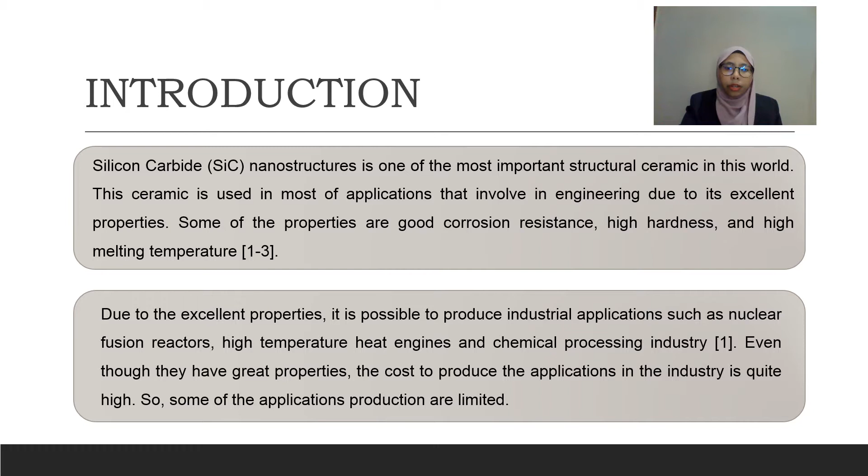Even though they have great properties, the cost to produce the applications in the industry is quite high. So, some of the applications' production is limited. Nowadays, the SiC materials are produced by using the Acheson process. The Acheson process is based on carbothermal reduction of silica by carbon in an electric arc furnace. Nevertheless, this Acheson process is based on an outdated technology which requires high-cost raw materials, excessive energy inputs, long reaction times, as well as products that require further processing before the intended applications.

Other than the Acheson process, these SiC materials also can be produced by a few other methods, such as by reduction of methyl trichlorosilane, by reacting metallic silicon and coal tar pitch mixture, and also by thermal decomposition of potentially inexpensive agricultural waste such as rice husk. Since the Acheson process is costly, the other method that is suitable to be used to produce SiC materials is thermal decomposition of rice husk. This is because the method is low in cost, efficient, and economic. Hence, in this work, SiC was synthesized by pyrolysis of rice husk by using some simple and low-cost equipment.

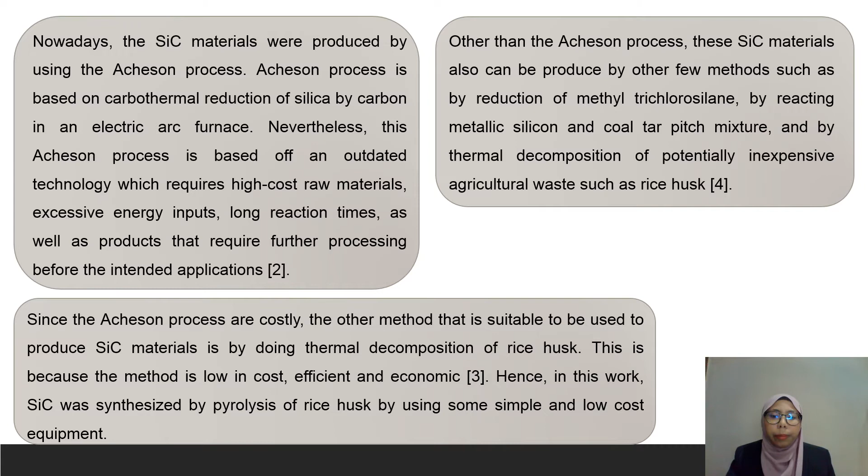For the problem statement, silicon carbide (SiC) is one of the non-oxide ceramic materials that have been recognized by the world for being able to produce strong and tougher composite ceramics and light metal alloys for structural products. With their good properties, the applications produced for the industry are limited due to high cost of production. Therefore, rice husk was used as the starting material to obtain the SiC materials.

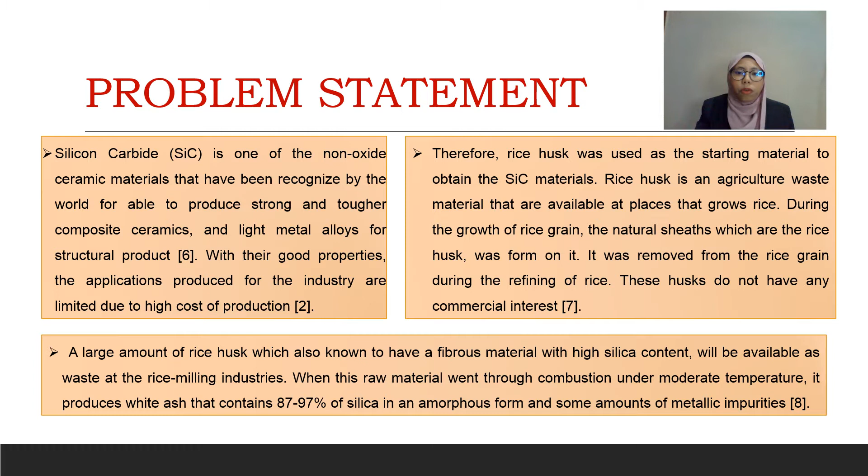Rice husk is an agricultural waste material that is available at places that grow rice. During the growth of rice grain, the natural sheath, which is the rice husk, was formed on it. It was removed from the rice grain during the refining of rice. These husks do not have any commercial interest. A large amount of rice husk, which is also known to be a fibrous material with high silica content, will be available as waste at the rice milling industries. When this raw material goes through combustion under moderate temperature, it produces white ash that contains 87 to 97% of silica in an amorphous form and some amount of metallic impurities.

Next, the objective of this project is to investigate the effect of size of starting material on the production of SiC. The second objective is to evaluate the morphology and the physical properties of the ceramic materials, including SEM or EDX, density, and XRD.

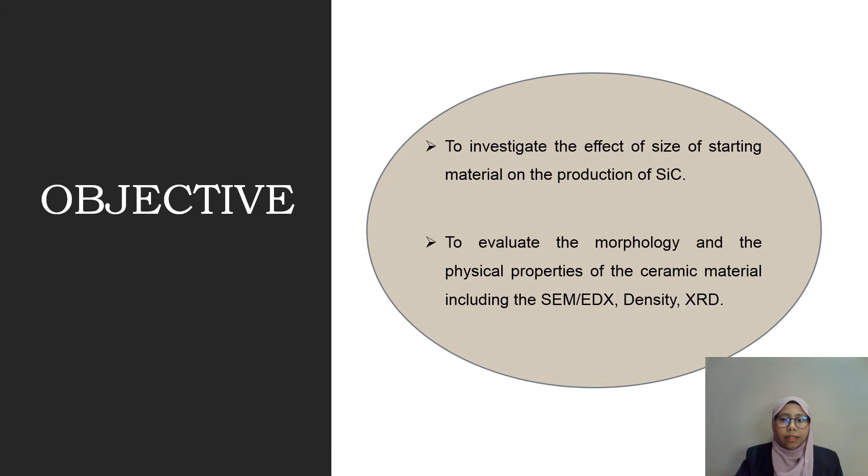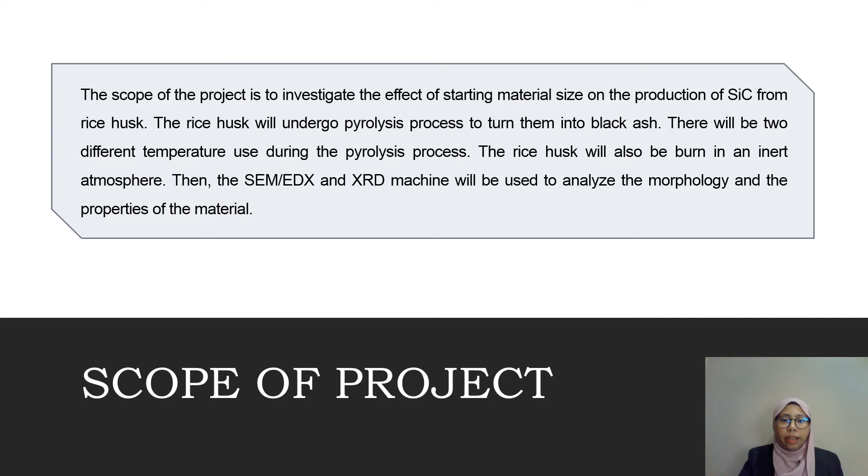Next is the scope of the project. The scope of this project is to investigate the effect of starting material size on the production of SiC from rice husk. The rice husk will undergo pyrolysis process to turn it into black ash. There will be two different temperatures used during the pyrolysis process. The rice husk will also be burned in an inert atmosphere. Then, the SEM or EDX and XRD machines will be used to analyze the morphology and the properties of the material.

Moving on to literature review. The first literature review is pyrolysis of rice husk to obtain SiC ceramic material. There are a few methods that can be used to obtain the silicon carbide material. Despite its excellent properties for industrial application, most of the applications were limited in production because the cost of production is high. This disadvantage has led to intense research on finding alternative sources of silicon carbide that are low cost and renewable. Therefore, rice husk has emerged as one of the promising candidates due to its finely dispersed carbon and silica that are in intimate contact. They also exhibit high activity with one another. Lee and Cutler were the first to have successfully synthesized SiC from rice husk in the early 1970s.

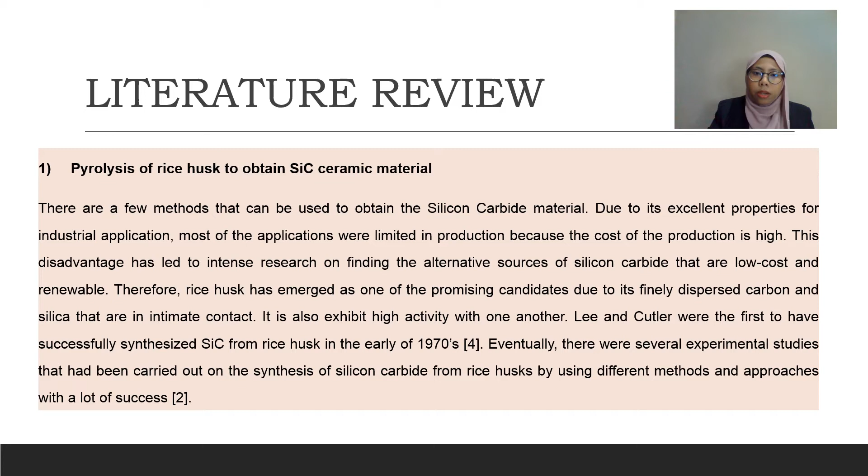Eventually, there were several experimental studies that had been carried out on the synthesis of silicon carbide from rice husk by using different methods and approaches with a lot of success. The synthesis of silicon carbide (SiC) by pyrolysis of rice husk was carried out in a tube furnace. In order to convert the organic materials, such as cellulose, into amorphous carbon, the samples were prepared by first coking the rice husk in a muffle furnace at 700 degrees Celsius for 10 minutes.

After coking the rice husk, the first sample was taken and milled for 3 hours in a Fritsch Pulverisette 6 ball mill using 20 mm diameter stainless steel balls at 200 rpm. This sample was labeled as ball milled. Then, the second sample was ground by hand using a mortar and pestle. The second sample was then labeled as hand ground. Meanwhile, the last sample was just as received after coking.

A mass of 5 grams of the prepared samples were each pyrolyzed at temperatures of 1000, 1300 and 1500 degrees Celsius. The heating rate of the pyrolysis was 10 degrees Celsius per minute from room temperature to the desired temperature. The time of pyrolysis was also varied at 60, 90, and 120 minutes. This is to determine which sample feature will yield the most SiC. It is also to determine at which conditions of temperature and time the samples would yield the most SiC materials.

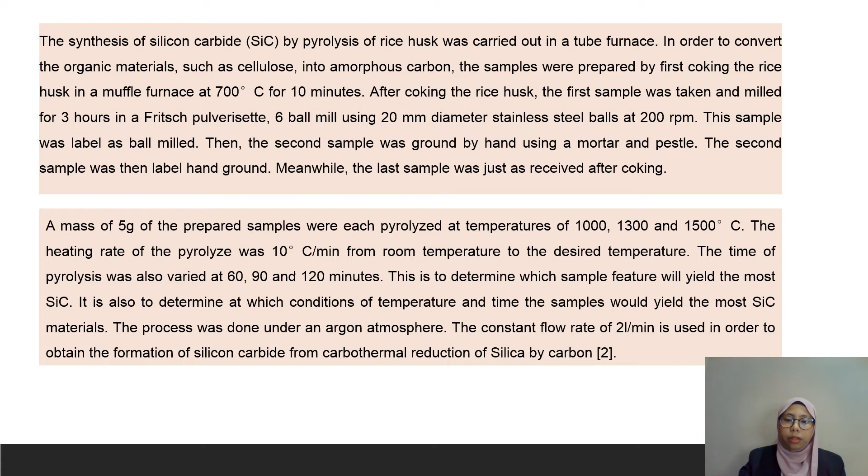The process was done under an argon atmosphere. The constant flow rate of 2 liters per minute is used in order to obtain the formation of silicon carbide from carbothermal reduction of silica by carbon.

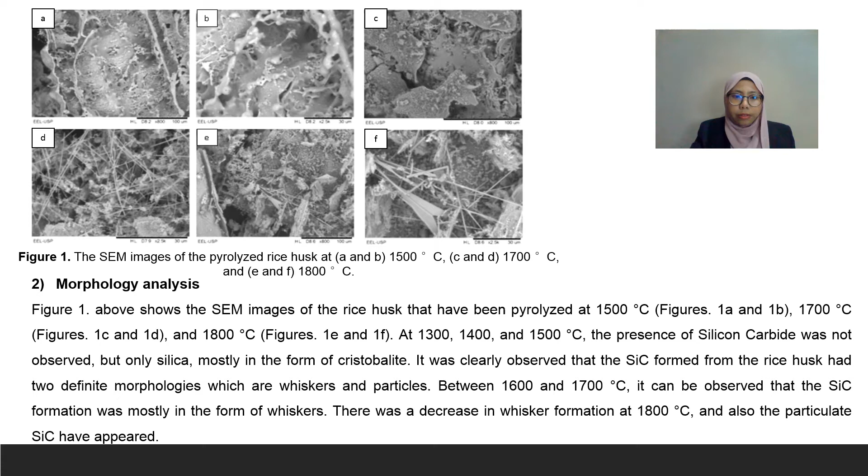Between 1600 and 1700 degrees Celsius, it can be observed that SiC formation was mostly in the form of whiskers. There was a decrease in whiskers formation at 1800 degrees Celsius, and also the particulate SiC have appeared. According to R.V. Krishnarao, when the temperature of pyrolysis is increased, the formed filaments tend to recrystallize. Then, the product becomes predominant in particulate form. The SiC whiskers formation seems to reach a maximum in samples pyrolyzed at 1700 degrees Celsius.

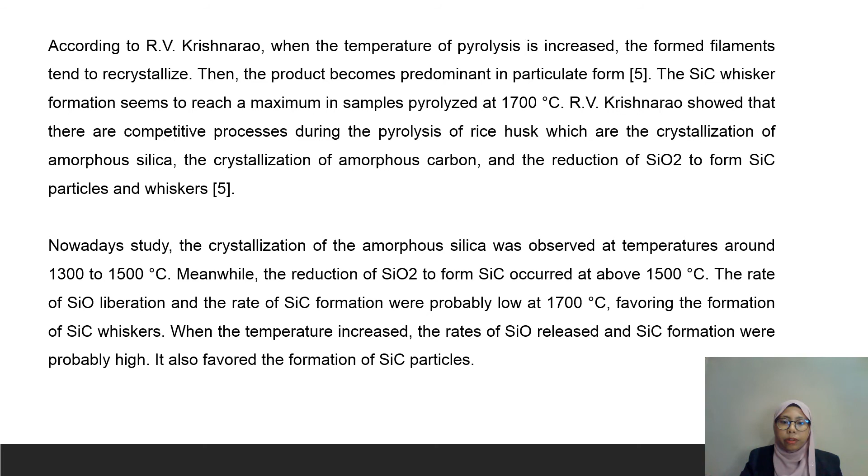R.V. Krishnarao showed that there are competitive processes during the pyrolysis of rice husk, which are the crystallization of amorphous silica, the crystallization of amorphous carbon, and the reduction of SiO2 to form SiC particles and whiskers. In the present study, the crystallization of the amorphous silica was observed at temperatures around 1300 to 1500 degrees Celsius. Meanwhile, the reduction of SiO2 to form SiC occurred above 1500 degrees Celsius. The rate of SiO liberation and the rate of SiC formation were probably low at 1700 degrees Celsius, favoring the formation of SiC whiskers. When the temperature increased, the rates of SiO release and SiC formation were probably high. It also favored the formation of SiC particles.

The third literature review is Physical Properties Analysis. Figure 2 presents the XRD spectra for the three samples that have been pyrolyzed at different temperatures. There was no sign of silicon carbide formed at 1000 degrees Celsius for all samples, but there was a silica peak observed at 2θ = 26.8 degrees for hand ground and ball milled samples. The peak observed is the amorphous silica that crystallized and transformed to its high temperature state, beta cristobalite.

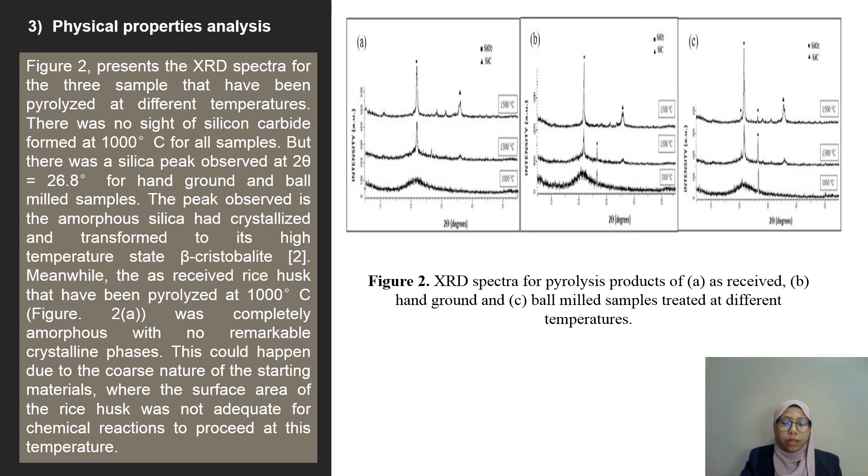Meanwhile, the as-received rice husk that had been pyrolyzed at 1000 degrees Celsius was completely amorphous with no remarkable crystalline phase. This could happen due to the coarse nature of the starting materials, where the surface area of the rice husk was not adequate for chemical reaction to proceed at this temperature. A new silica peak was observed at 2θ = 35.8 degrees for all samples when the temperature was raised to 1300 degrees Celsius.

This implies that more silica had crystallized due to an increase in temperature. It is worth the observation that SiC only started to form at 1300 degrees Celsius for all the three samples, even though in small quantities, as evident from the short XRD peaks. The low yield is maybe due to the pyrolysis temperature being low, which does not enable adequate chemical reaction between silica and carbon in the rice husk. The peaks for both silica and SiC increased as the temperature was increased to 1500 degrees Celsius.

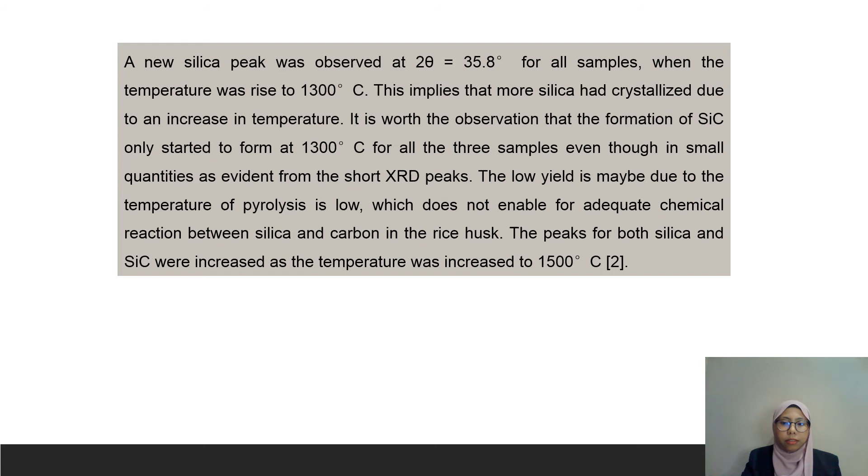Next is the methodology for this project. We start with the pre-treatment and then we go to the pyrolysis process. After the pyrolysis process, we will analyze the rice husk through morphology analysis and also physical properties analysis. The morphology analysis will be done using SEM or EDX. For physical properties analysis, we'll be using XRD and density.

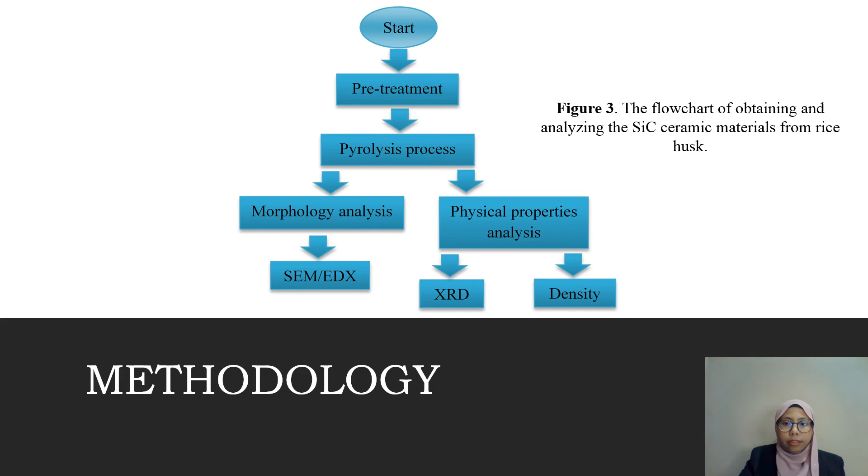During the pretreatment, first the rice husk will be washed with water to remove any dirt or other contaminants that exist in them. Then dry the rice husk for a few hours under the sun or by using an oven until it is completely dry. The dried rice husk was analyzed under the XRD analyzer to determine the crystallinity of the rice husk constituents. The SEM microscope is also used to analyze the morphology of the dried rice husk before going to pyrolysis.

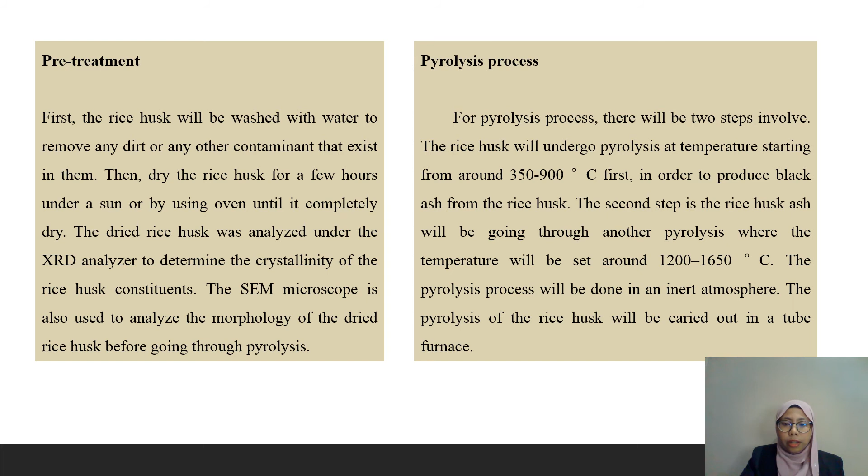For the pyrolysis process, there will be two steps involved. The rice husk will undergo pyrolysis at temperatures from around 350 to 900 degrees Celsius first, in order to produce black ash from the rice husk. In the second step, the rice husk ash will go through another pyrolysis where the temperature will be set around 1200 to 1650 degrees Celsius. The pyrolysis process will be done in an inert atmosphere. The pyrolysis of the rice husk will be carried out in a tube furnace.

For morphology analysis, we will be using SEM or EDX. SEM is scanning electron microscopy, which gives a detailed high-resolution image of the sample by rastering a focused electron beam across the surface. It also detects secondary or backscattered electron signals. Meanwhile, EDX is an energy dispersive X-ray analyzer, EDX or EDA. It is used to provide elemental identification and quantitative compositional information. Therefore, the microstructure of the SiC ceramic material from the rice husk ash will be observed using either SEM or EDX equipment.

For physical properties analysis, we will be using XRD. XRD is X-ray diffraction analysis, a technique used to determine the crystallographic structure of a material. XRD measures the intensities and scattering angles of the X-rays that leave the material by irradiating it with incident X-rays. XRD is also used for the identification of materials based on their diffraction pattern. So, XRD analysis will be used in this project to identify the existence of the SiC ceramic material in the rice husk ash.

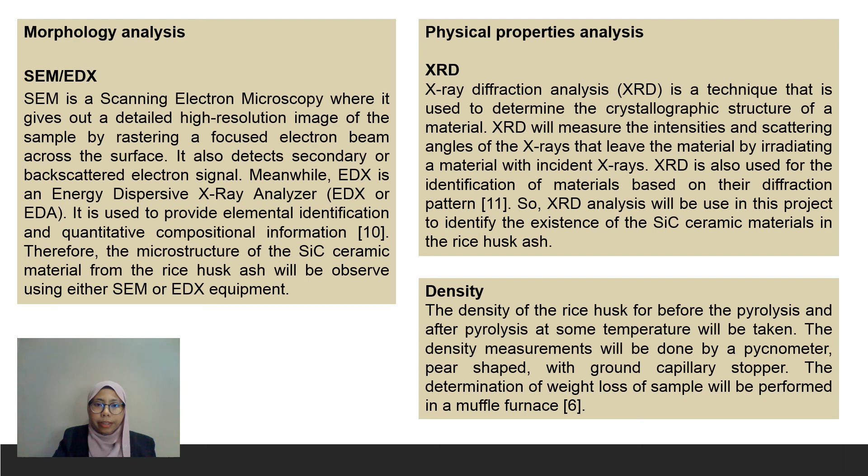For the expected result, at the end of this project, the optimum size affecting the final product of SiC can be estimated. The morphology and physical properties of the rice husk ash can also be observed. The result may differ from past research after the test has been done. This could occur due to the type of atmosphere the pyrolysis takes place in or the type of rice husk used. Based on past research, the density of the SiC increased as the pyrolysis temperature increased. The silica content will also increase when the temperature is increased.

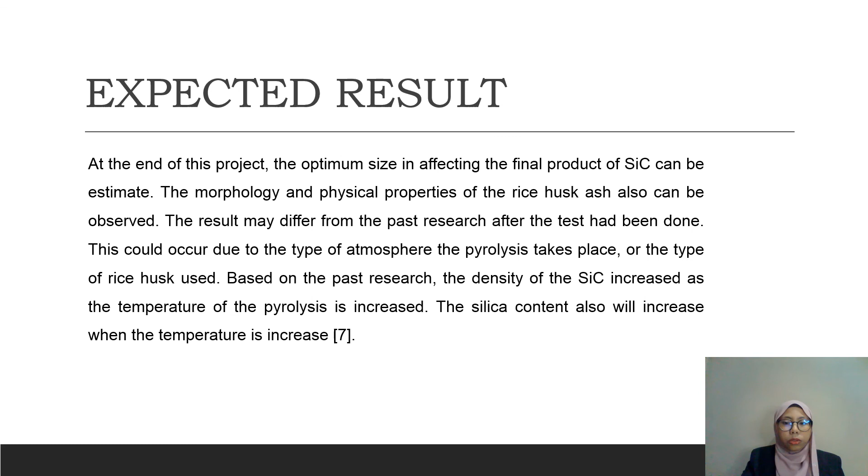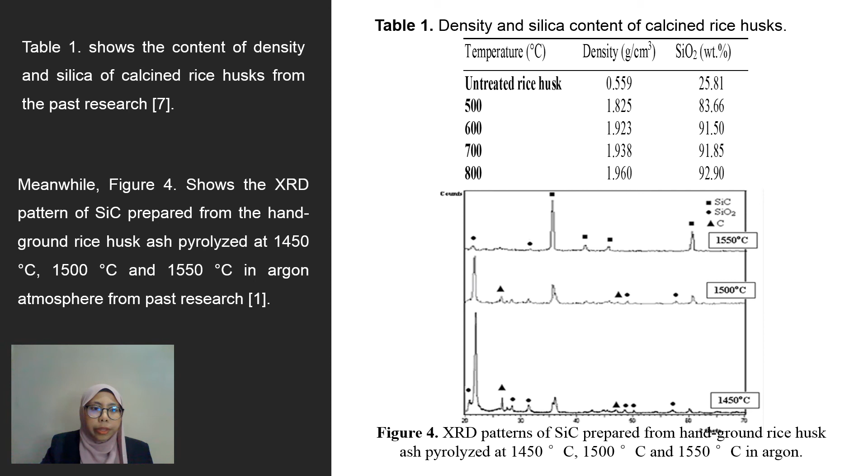Table 1 shows the density and silica content of calcined rice husk from past research. Meanwhile, figure 4 shows the XRD pattern of SiC prepared from hand-ground rice husk ash pyrolyzed at 1450 degrees Celsius, 1500 degrees Celsius, and 1550 degrees Celsius in an argon atmosphere from past research. Based on the past research, I hope that my result will be better than the past research result. That is all from me for my FYP1 proposal.